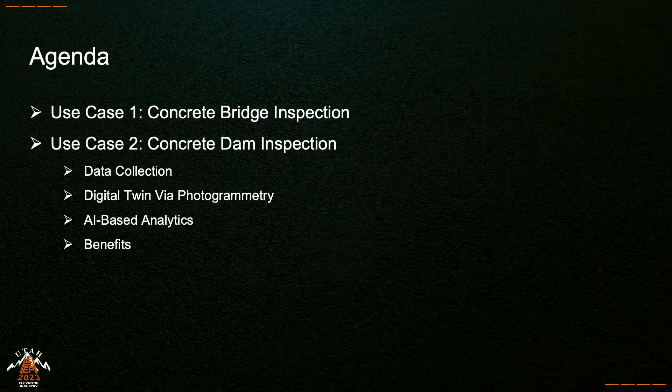All right, so first up is our concrete bridge inspection. So what we're seeing here is a bridge. This was a project that we did with B&N. This is a large scale concrete bridge, obviously. Each one of the red rectangles indicates where an image was collected during this.

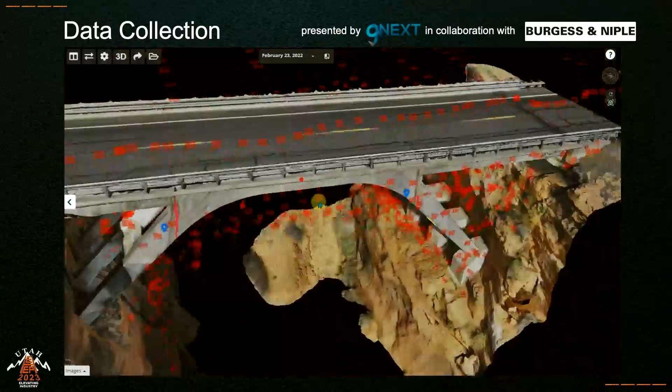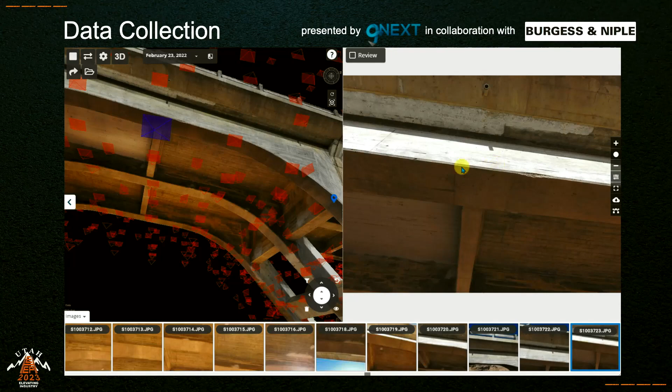We're going to run a couple of short videos here. The data was collected utilizing a Skydio 2 with 3D scan. You can see it was able to get all the nooks and crannies all the way under here and really get to a lot of the underlying detail and data. 12 megapixels never looked so good.

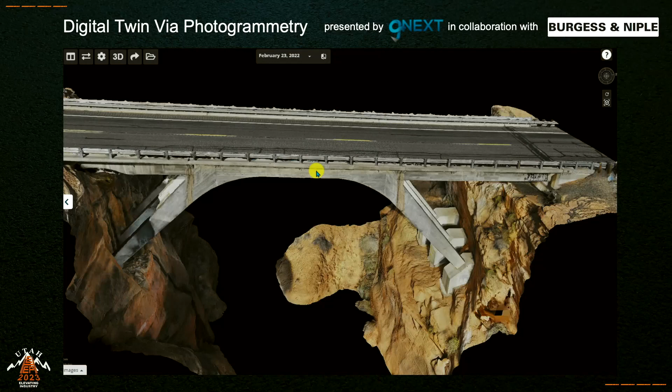Next, we're going to talk about the photogrammetry aspect of it. We'll see a 3D model here that was processed in the 9NEXT engine. And as we go along, we'll see the user interacting with the 3D model, getting up close and personal and looking at these cracks. And there's some very significant ones.

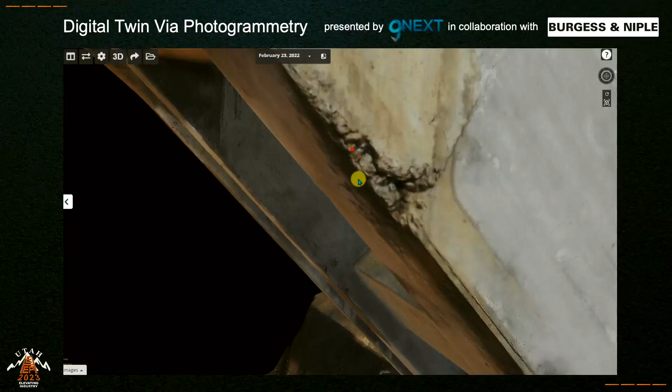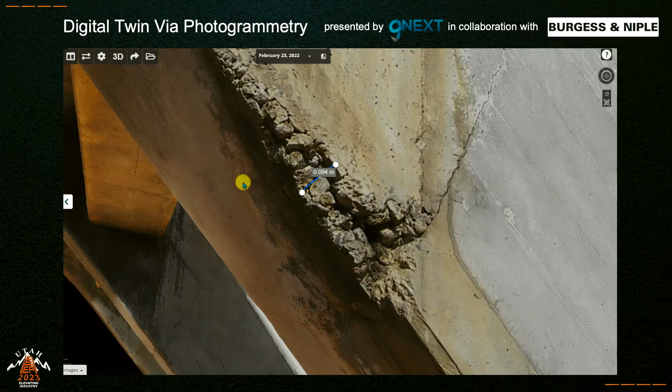As a matter of fact, the data collector told us later he didn't see any of these big cracks and spalls. He couldn't access them without rope access. So they weren't evident to him. And when he saw it, he was really blown away. See some quick analytics being gathered here.

And any place that you want to be able to explore more, double-clicking on the 3D model gets you to that most important underlying image that exists. In this case, it's highlighted in the lower right-hand corner. That's the image that we're looking at, and all the others that have a view of that spot are adjacent to it. So you're able to get quickly a good feel by looking at the 3D model as a reference, being able to get to that underlying data.

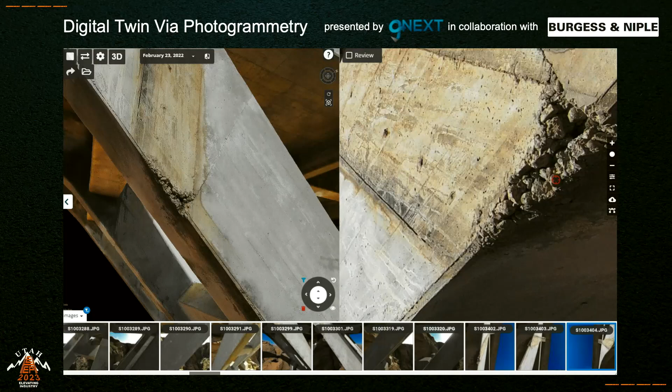All right, Abraham. Thank you, Ross. So now that we have all of this data and the infrastructure has been digitized, we can train AI algorithms to help them find, quantify, and track the changes over time of these defects, right?

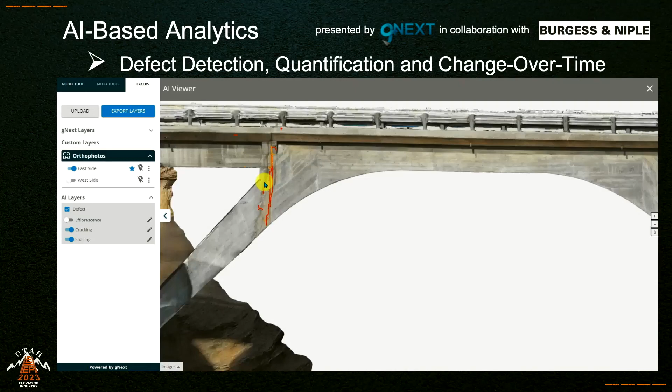So first, this is the 3D model created from the drone data. On the left, you can see the defects that were found by the AI. In this case, for this particular bridge, only cracking, spalling, and efflorescence were found. However, the AI we developed for concrete can detect exposed rebar, spalling, efflorescence, vegetation overgrowth, and we are continuing developing that catalog for concrete.

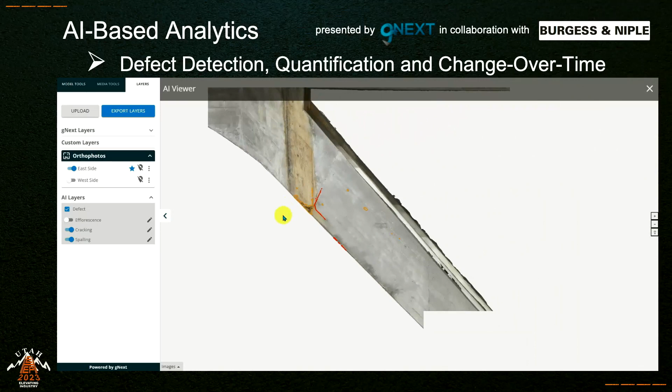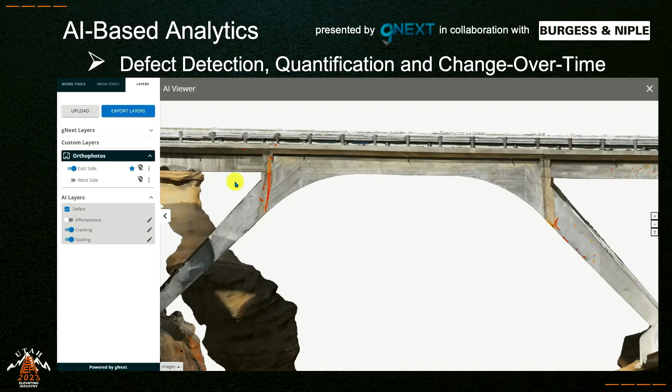Here, the user is just hovering the mouse on top of the defects, and then you can see the quantification of these defects. I'm going to go back for a second, just in case you missed it. The user is going to zoom in to those particular cracks, and then hover on top of the crack, and the system will show the average crack width, the length, the max crack width, and the ID of that crack. So as the mouse is hovering over that defect, you can see all of that information.

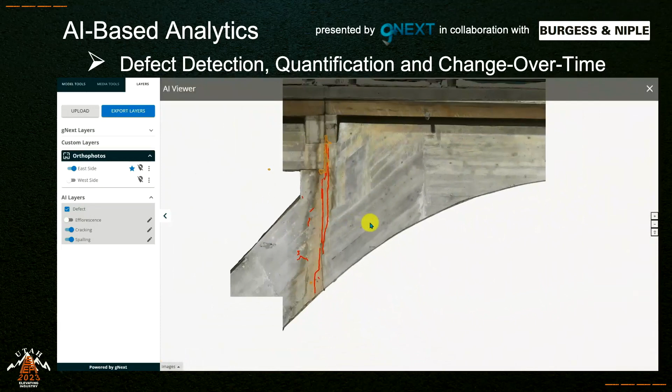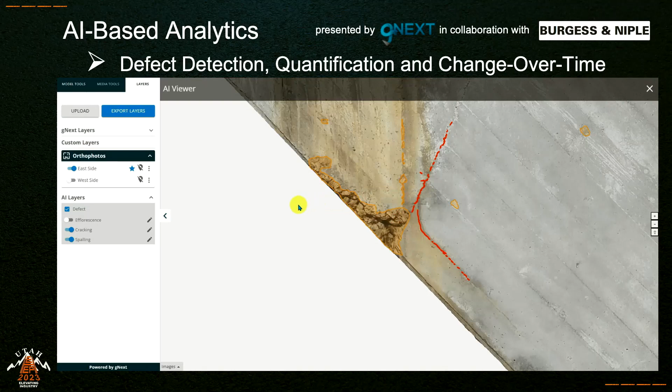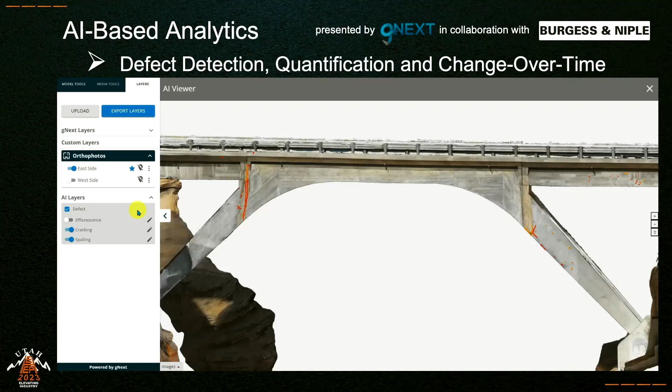Now, because everything is geolocated, we can track those defects over time. So if you do this again next year, we're able to tell you, hey, this crack grew by X percentage, or by 10 feet, or the crack width increased by 10% or half an inch. All of those can be tracked over time, and we're going to show you some examples later on in some slides of how all of this helps reveal patterns and interactions between crack, efflorescence, and spalling, which typically have a connection between them.

So now that we have found those defects and we have quantified their properties, that's great, right? But you're still bound to create the deliverables that you have been delivering for quite a while, and that are required by your customers, which typically is a CAD drawing of the defects in the infrastructure. So these AI outputs can then be vectorized, and they can be used to create this CAD drawing.

What you're seeing right now is a CAD software, in this case Autodesk, but it could be opened in Bentley or any other CAD software system, where the AI produced these CAD drawings in a DXF open source format that use the imagery from the photogrammetry and the AI results to then produce the drawings of all of the defects found in the infrastructure. So I'm going to play the video.

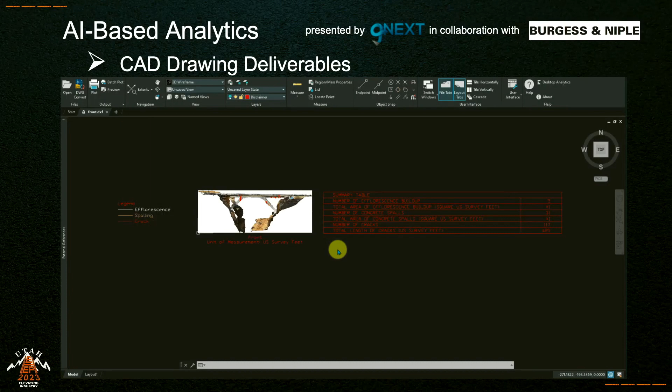And you can see this is a CAD drawing. On the left is the legend of all of the defects, again, created automatically by the AI. On the right, you have a summary table of all of the defects, saying what is the amount of cracks, what is the total crack length, amount of spalls, et cetera.

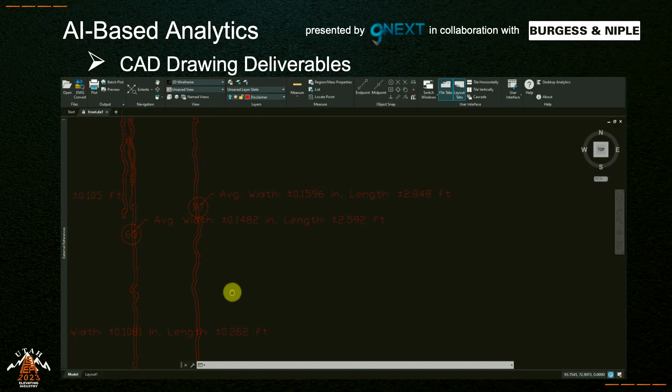So we're zooming in. As part of the CAD drawing created by the AI, you also have a base image. So not only do you get the CAD drawings of the defects, but you also get a base image that corroborates the CAD drawings. That way you can validate that the cracks that we're marking in the CAD drawings are actually cracks in the infrastructure.

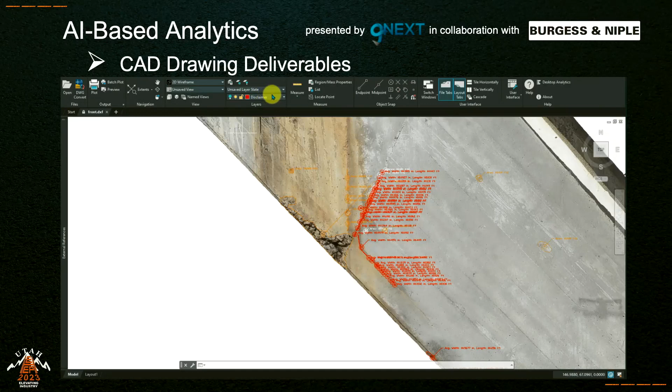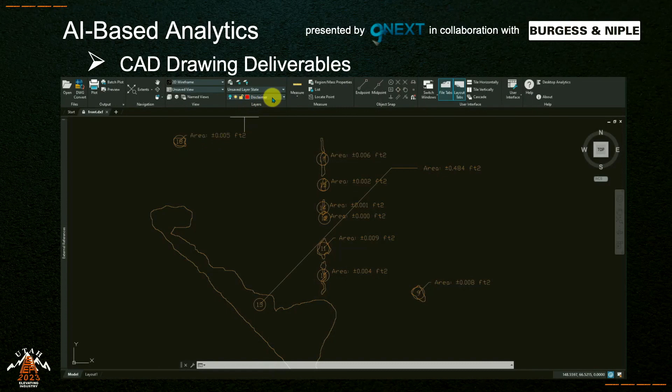Here we're moving now into spalling and honeycombing. And all of the defects in the CAD drawings are organized in layers that, again, allow the user to make their edits, to adapt it so they can then deliver the final results to the customer. And again, all of this is being visualized in Autodesk, so pretty much any CAD software system can use this deliverable in such a way.

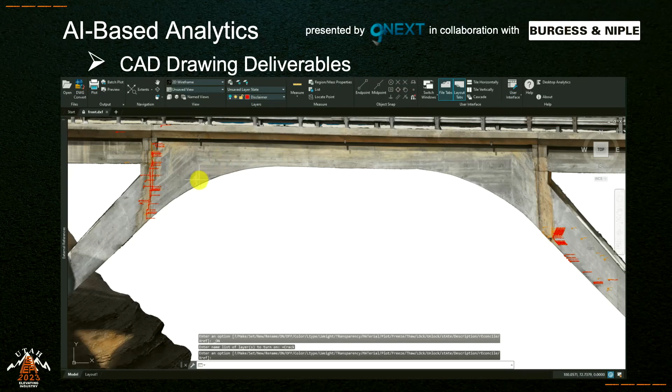From our customers, what we have heard is that this reduced their time by more than 90% in producing the CAD drawing deliverables for their customers. Now, something that is also critical for the inspection is producing a total quantification of defects. So the AI also produces these table sheets with all of the quantifications. So if you need to know the total area of spalling, because you're doing a repair and you need to do an estimation of it, all of this is already included in this table that you can use for those estimations.

And this is done for any of the defects found by the AI, which again covers cracks, spalling, efflorescence, vegetation overgrowth, and exposed rebar as of now.

So Abraham, if I were out in the field and needed to access that information, how would I do it? You can just open your phone with an internet connection, and you can access all of that information on your phone. So if you need to analyze where the defect is that you wanted to find in the field, you can visualize it there. If you want to know how you're going to get access to that location, you can figure it out there. So it's information that you have available both in the office and in the field.

Thank you. I make a great shield, don't I?

All right, let's talk about some of the benefits: the reduction of risk. We heard from several speakers about the high-risk nature of bridge and various infrastructure asset inspection to the inspector. Deaths and great injuries. So what we're talking about is the ability to reduce the amount of rope access and the amount of hazardous duty for the inspector. And that relates directly to reduction of costs, as well as speed of delivery for that assessment, improved asset documentation, quantifiable and trackable metrics, and most of all, the ability to see change over time and how that asset's performing as it's being monitored.

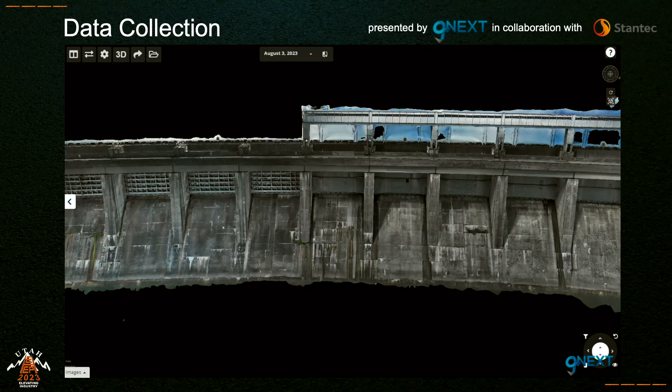All right, number 2 is a dam inspection, and this is done in collaboration with Stantec. This was a large-scale dam, 13 bays. We're going to look at the data collection. Again, spoiler alert, this was collected with a Skydio 2 with 3D Scan. There were about 12,000 images collected for these 13 bays, and we're really getting a great sense of how that data was collected.

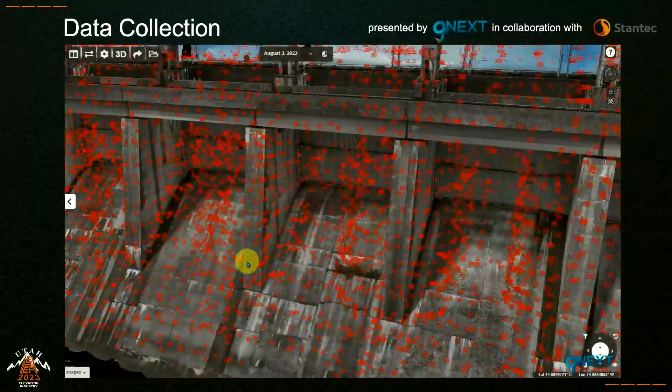All the nooks and crannies were accounted for, and I'm pretty sure that drone sustained no damage thanks to its collision avoidance capabilities. The great thing about being able to visualize how that data was collected is that you get back to the office and you see, man, there's a gap in this spot. How am I going to deal with that? So the ability to understand that and identify future capabilities and future SOPs.

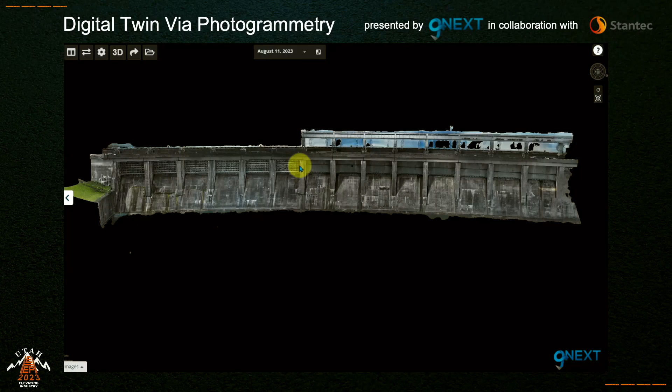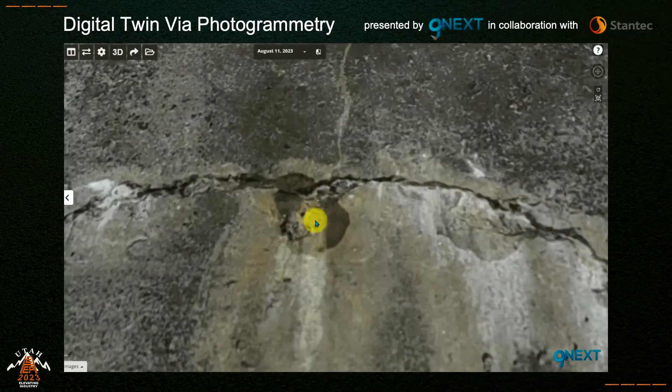Next, we're going to see the underlying result of the photogrammetry. And again, the ability to navigate through the model, being able to see all of the specific areas of defects. And this is really helpful in understanding there are 3 bays out of this that we really need to send somebody on rope access. We don't need that in every one of these bays. Again, the ability to reduce risk.

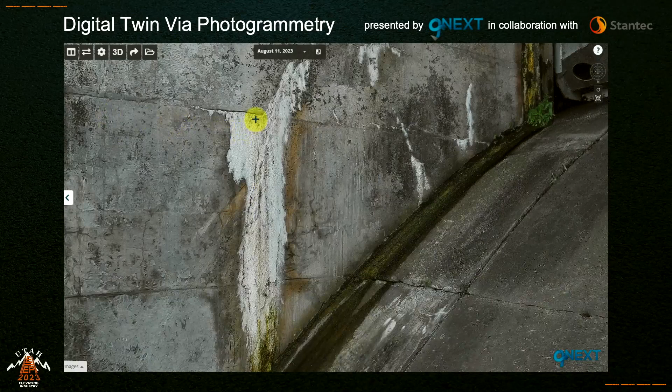Seeing some more of this efflorescence and the underlying cracks that caused it, and being able to make measurements, sub-millimeter in this case, directly onto the model. Another quick analytic gathering, and off we go.

So, going back to the AI applications, right? In this case, being used for another concrete structure. In this case, the 3D model was then transformed into cross-sectional views so that it resembles the traditional drawings that the client needs to have available, right? So in this case, the software produces cross-sections of the 3D model, and then those are being used to visualize, again, the AI defects found.

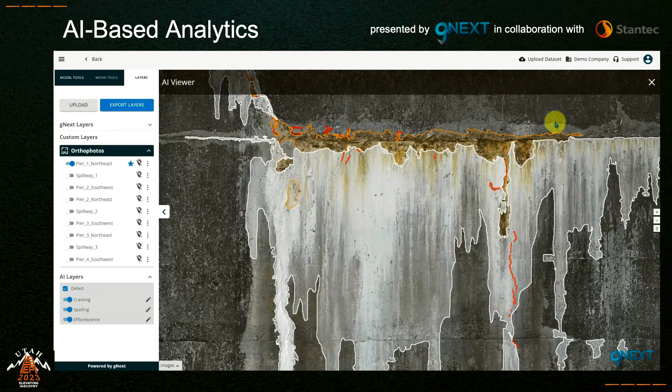In this case, in the dam, we're gonna see other types, not only cracking, spalling, and efflorescence. In this case, the user is, again, turning each of the layers on, in the sense that if the user wants to see the cracks only, or the cracks and the efflorescence, or all of the defects combined, which in the next slide you're gonna see how it could potentially be useful, because it can help uncover patterns about the relationships that they have together.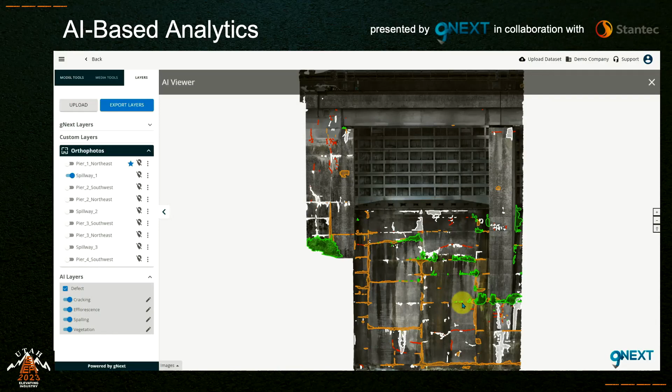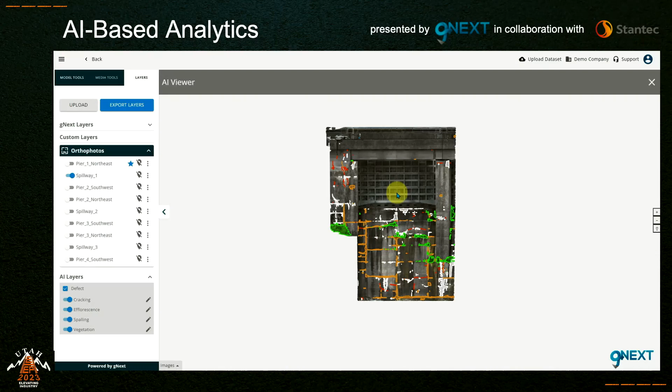So in this case, if the user hovers on the efflorescence, it will tell them what is the ID of that efflorescence, what is the area, and same with spalling. In this other scenario, we can see also the vegetation overgrowth that was being shown in green. Going back then to the final deliverables, right? The results of the AI are then vectorized to produce a CAD drawing that can be opened in any CAD software.

1 second. Excellent. And then going back to this here, we're going to zoom into a section again, just to show that pattern that I was talking about, which seems like the video is stuck.

Well, the video is stuck, but it was going to zoom in the center where you can see how cracks turn into spalls and then go back to crack, and then turn to spall, and then go back to crack. Or how the efflorescence grows from spalls or from cracks. All of those patterns are visible from these outputs, which, I apologize for the issue, it seems we weren't able to show you today.

But with this technology, by continuing to do projects like this, we hope to be able to uncover how the defects evolve over time, and then develop analytics that will help us predict how these defects will evolve over time.

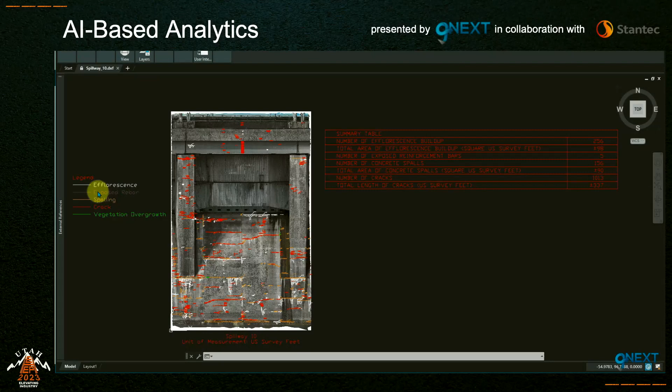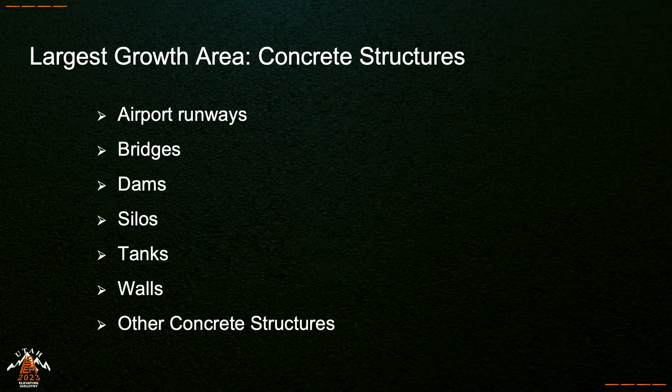And it's not just dams and bridges, but a whole litany of other concrete areas for inspection, and that's what we're focused on with this iteration, this catalog. We've got a couple more catalogs in the works to apply to other asset types as well. And with that, I think we just came in under the wire.